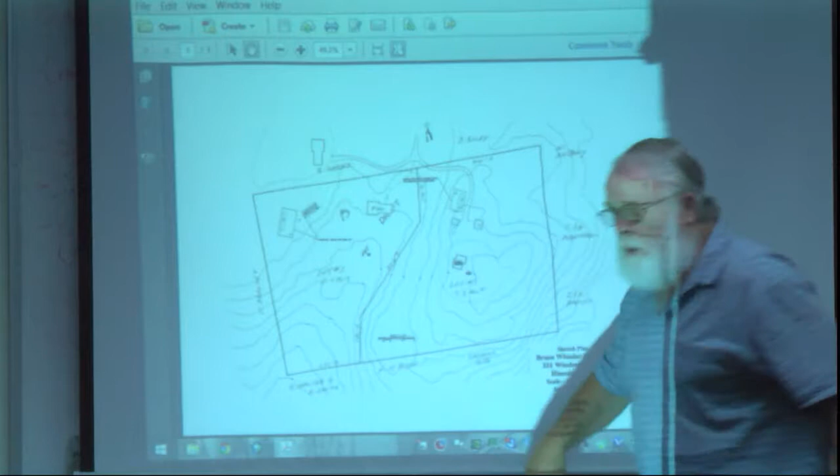So, where's that? I'll get up closer here. Just to the left of where the cursor is a little bit, right about in here in these contours. Yeah, and so that may end up having a 50-foot buffer around it, and the house is set so that that could be accomplished. And there's a right-of-way that comes in here.

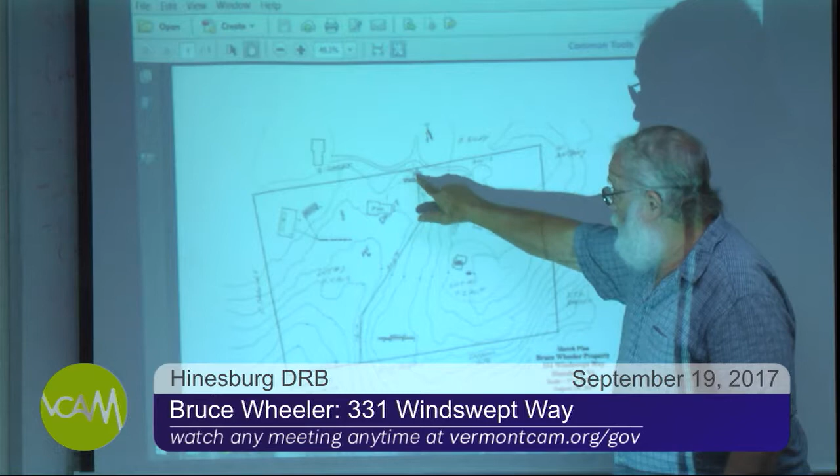The former subdivision north of this shows 50 feet coming right to the boundary here. This line will start, there's a pin on each side of the right-of-way, and this will be the easterly pin that makes the beginning of that line. So this 50 feet will come right to the boundary.

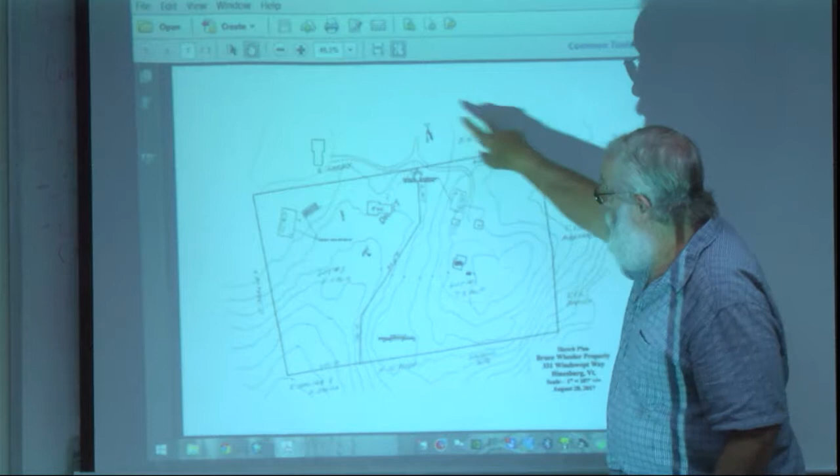So where does that way end right now, serving? The survey of this subdivision to the north shows the right-of-way coming right to the boundary. So are you going to keep the same driveway going off the existing house, or is that out of the right-of-way? That's a good question. I think it's just been there long enough to have it closed. Right, yeah.

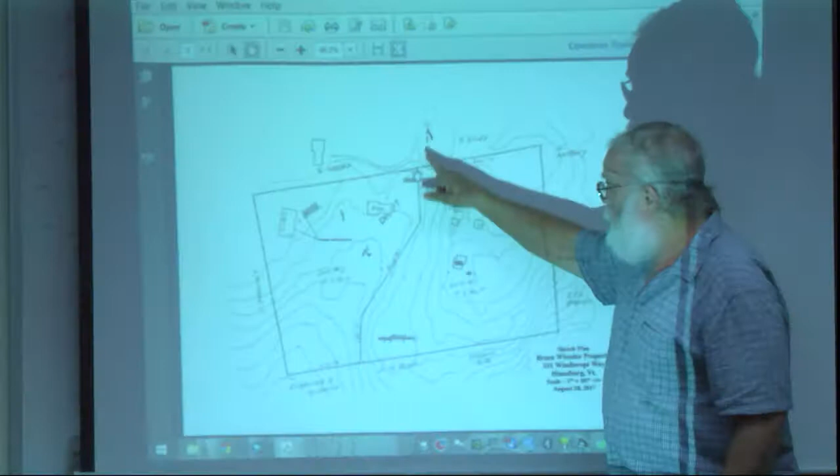So this new extension will be right through the right-of-way, opening onto the property. And the other will be reconciled with the neighbor. How many houses does Windswept Way serve?

How many houses does Windswept Way? Is it along? Didn't do a count. The total in the neighborhood, if you come up Obie Ridge Road and go straight, and Windswept Way, there's 19 houses altogether, I believe. It's probably 6 off Windswept Way.

Okay, well, using the location, you have Windswept Way here, and you have Obie Ridge, which comes, I think, there. And so you probably count them from here: 8, and Bruce is 9, and this would add 10, number 10.

And the condition of Windswept Way? What's the condition of Windswept Way? It's really excellent now. There's a lot of work done to it this summer. I see. I maintained it while I was there for years, and then the last couple of years it needed some repair, but it's had $10,000 or so put into it just recently.

You put up the one with the contours. Sure. This division, Bruce's house, existing house is here, and there's a fairly steep embankment going down to the west from the house, and the line will be in towards the bottom of those contours. I believe that was the Old Town Road way back. Oh, really?

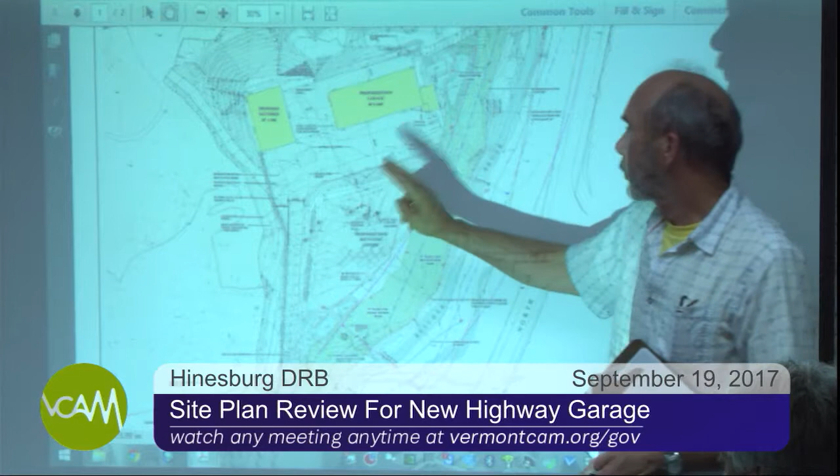Actually, there will be a time when CSWD has to move off-site because they've got to demolish this facility before they can build the new one here. And during that time, the access drive will be built and the rest of this will be paved in advance. So phase 3, 3A, let's call it, will be demolition, 3B will be construction, and then 4 will be the town coming back under separate contract and building the salt shed.

So how many years are we talking about for the phases? About a year and a half from now, if all goes well. All 3 phases? Yeah, all 4 phases. And how long will the drop-off center be out of commission? Well, I think Brian has to get back, but 2 to 4 months, maybe in that range.

It's about 2 weeks to demolish the existing facility, and then I think it's a little premature. He just saw the final version of this phasing plan, which has been evolving. There's a lot of entities here. There's the contractor, CSWD, the town self-performing some work, and then the town is hiring some work out by other contractors. So there's a lot of moving parts, trying to use what's already a small site to minimize the disruption.

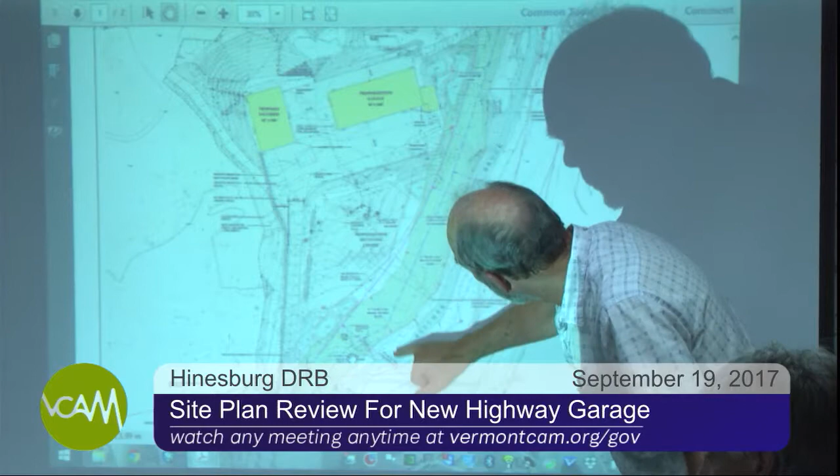Yeah, that's it. Maybe pull that up. Which one is that? I think that's what was up. I was pulling up this one? Yeah. It's there, it's just blurry. Oh, okay. Maybe zoom in into certain areas.

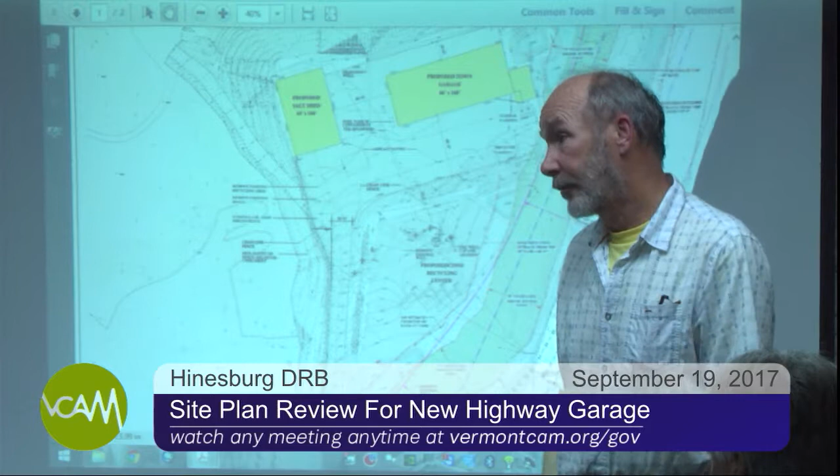I'd like to know what's there now, what's going away, what our roads are. We have an existing conditions plan, so maybe that's a place to start. Let's see. So this plan shows what's there now. Could you go bigger, Mitch? Yeah, I've been there, but that doesn't tell me anything. If we could blow that up.

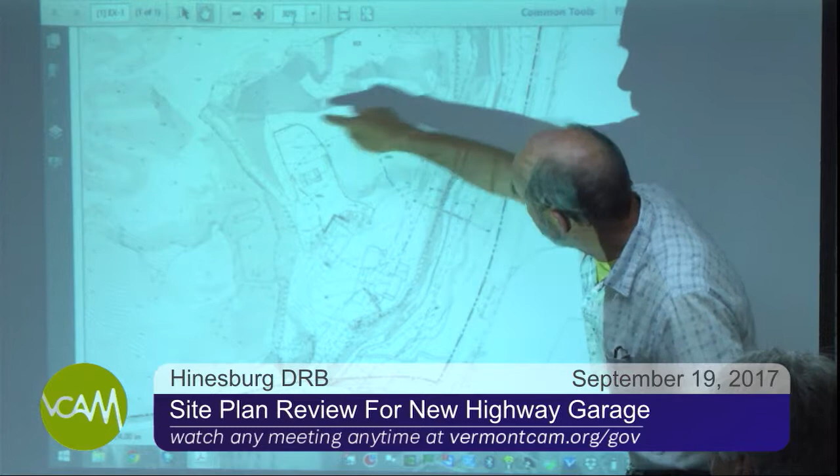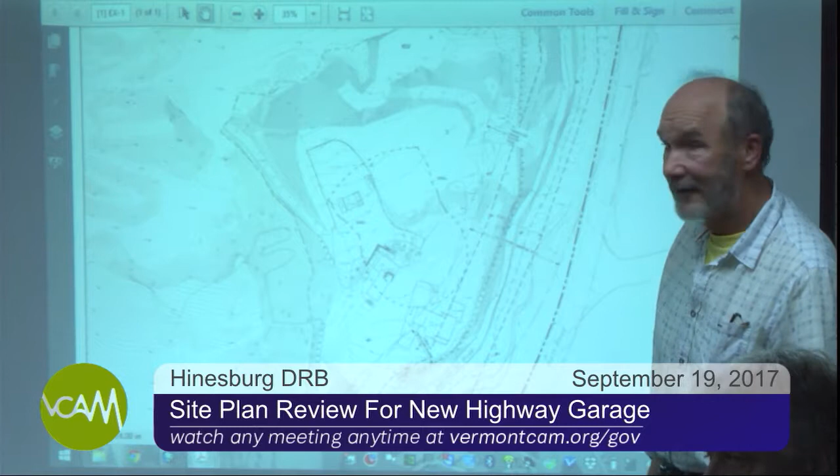Do you guys mind if we turn off the lights? Yeah, that'd be fine. If you don't mind the snoring. I'll poke you. The switch is over there. Got it. Thank you.

All right, so just to orient you, this is Beecher Hill Road. Existing driveway comes in here. The current town garage, the main building, is here. The brook is right here, so it's, I don't know, 30 feet from the brook. 12? 12 from the top of the bank, it's close. There's other structures and pavements around. There's a pole building over here which also belongs to the town garage.

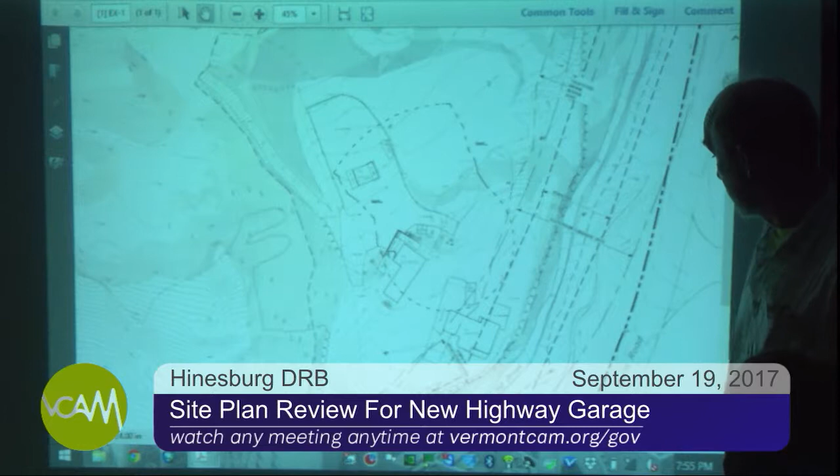Access to the recycling site is between these two buildings. The little entry booth is there, the little steep uphill is here, and then this is the current recycling drop-off center. They've got roll-off containers here for the metal and the trash, the original recycling shed, and some other trailers back here. This line here is a chain link fence. This is an open plateau right now, and that's where the new building's going.

There's an existing access road that Mike uses there, and another one over here to the upper part of the site for gravel. The open plateau is pretty much on the same grade as the parking lot. It used to be higher. If you haven't been there in 6 months, you'd think it was 6 to 8 feet higher, but Mike took a lot of that gravel out. Okay, that's why I'm confused, I didn't remember it being at the same level as the parking lot area.

So the idea is to build a structure there; the gravel slope behind would remain. These structures would be demolished, and any new construction would move out of the river bank area, 75 feet. Steve, would it be helpful if I showed the phasing plan? Sure, I think that might say a lot. Do you remember which drawing that is? I think it's L1.1.

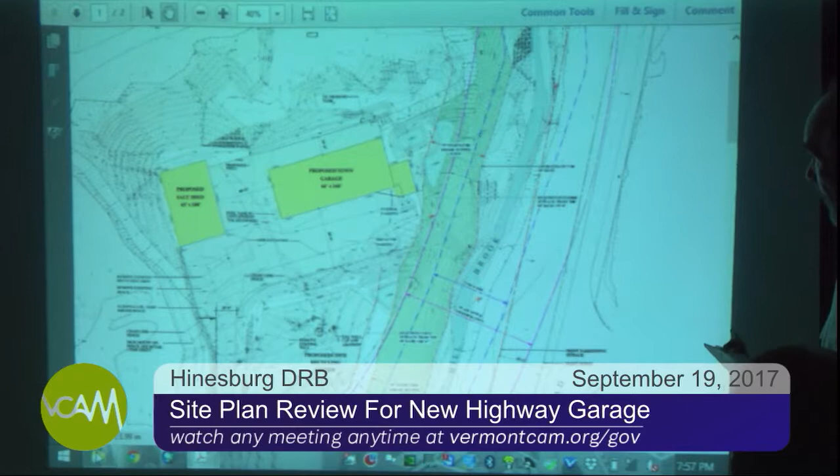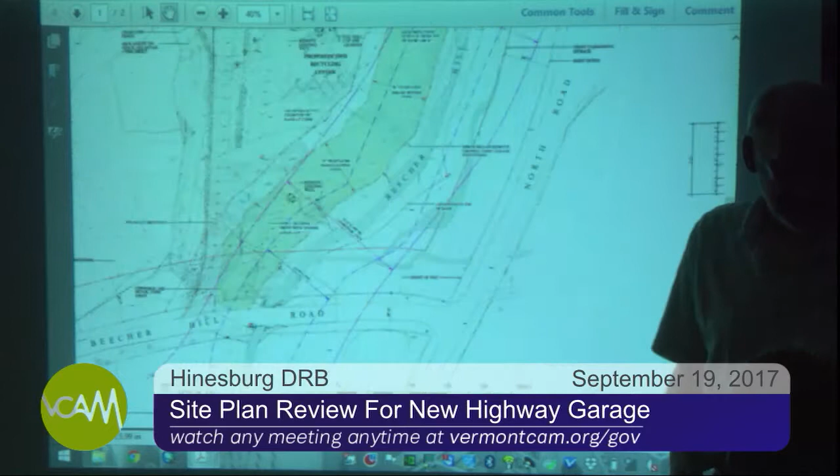No, so that's the overall site plan. Let's see. Maybe it's this one? No. L1.0 and 1.1, I think. Oh, wait, that's what it is. I forgot about that. This is in two sheets, so we just have to move down over here. Here we go.

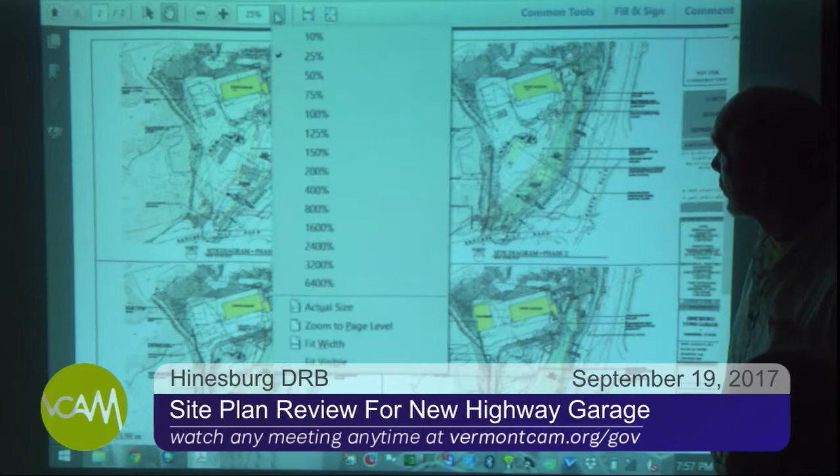I'll just show the overall, and then I'll zoom in on each of these phases. Let's start with phase 1. All right, so these are the 4 phases. So phase 1, recycling drop-off center stays the same. Booth is in place, really no changes other than the fence at the northeast corner moves in to allow a little more room here for access.

And Mike, you plan to use this for your salt? Winter sand. So construction access is shown by this arrow, up to this upper plateau, the town garage buildings stay, no work in the riverbank. And since this was done, we've added the new electric service as part of phase 1 too, but that's underground.

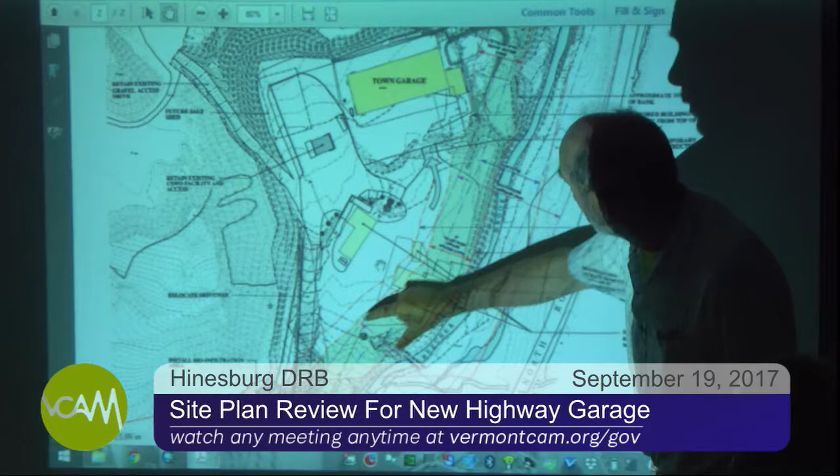So phase 2, these buildings are demolished, and much, not all, but much of the work restoring the stream bank, the river corridor is done. At the start of phase 2, the town moves into the new garage, which is substantially complete.

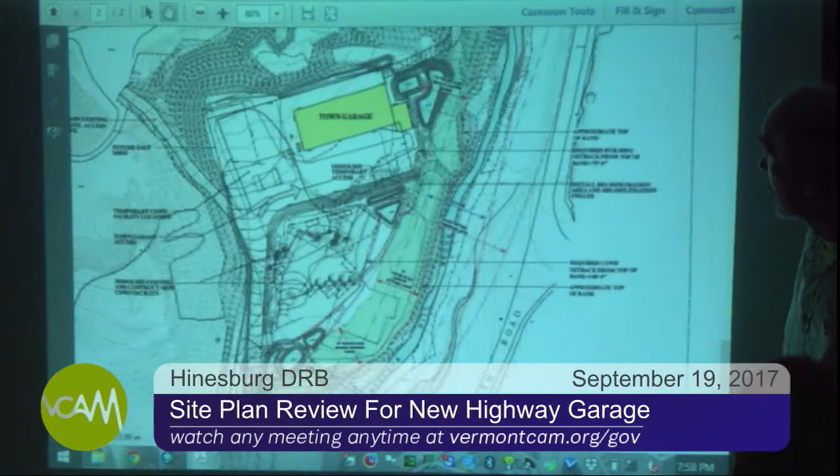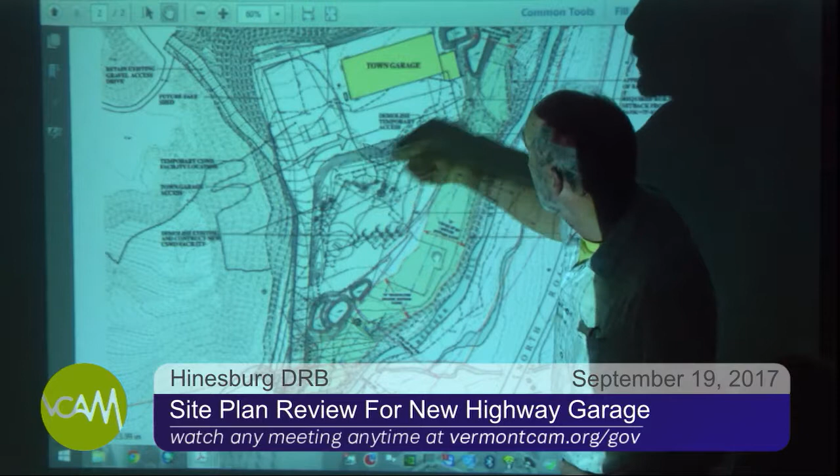In phase 3A, which we're calling it now, this facility is demolished and CSWD moves off-site while the new driveway is built. The old driveway comes in like this. The new driveway slides a little bit west out of the river corridor, not completely out, but as far as we can go without getting into this hill. And the rest of the site is paved, and the rest of the river corridor is restored. The fourth one is just construct the salt shed.

Is there equal paved surface in each plan? I don't remember there being a lot of paving currently. No, most of the town area is unpaved right now, it's gravel. So I think there's a net reduction in impermeable area. By an acre, right? 1.55 acres less impervious. So how do you accomplish that?

A lot of the area there is compacted gravel that they use for parking and driveways. Almost all of the area that's green on there is right now compacted gravel, which under the state stormwater rules is considered impervious surface. So because all of that is going from compacted impervious gravel to a pervious vegetated area, we're actually reducing the impervious surface by quite a bit.

There are no retention areas there right now. No, it's flat gravel, primarily, going directly into the stream. And there's proposed to be those ones to the south, the one in the middle and the one on the upper. Those are all basically retention areas. You want to explain how those work? Yeah, so what's really nice about this site is that it has gravel under it, so those stormwater basins are infiltration basins, which is kind of the best kind. It means that you're not just retaining the water for a little bit, you're actually infiltrating it. It's the best way to treat stormwater, and it's what the state looks for as their top tier treatment option.

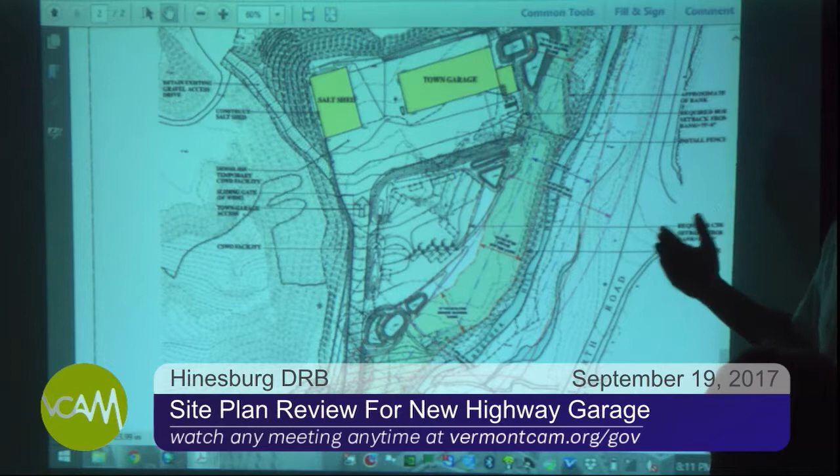In that area, say for example just above the staggered bins, there's a fairly substantial... is that an old grading plan? Yes, that's an old grading plan. The contours that run through there? You've seen the demolition below, all the different layers. Okay. So if you had a clearer drawing. That's relatively level. Right. It seems as if the apron for the town garage compresses this a little bit, and I presume that's a fairly substantial drop off that apron to the recycling facility? No, I think they're pretty level. They're within a foot of an elevation.

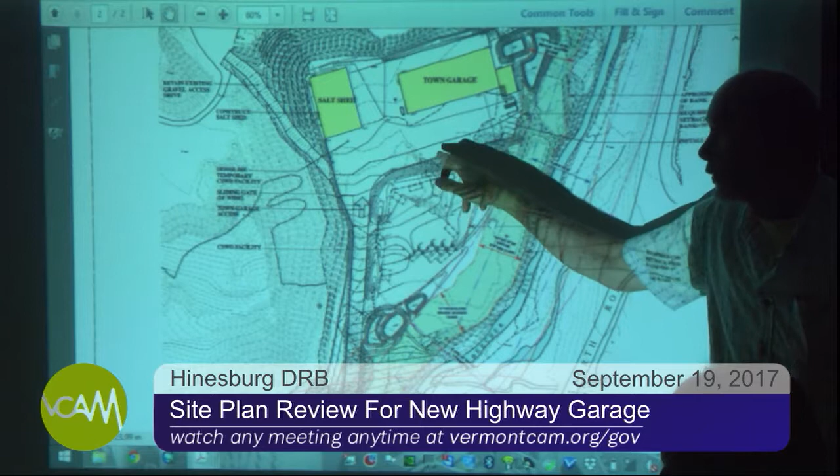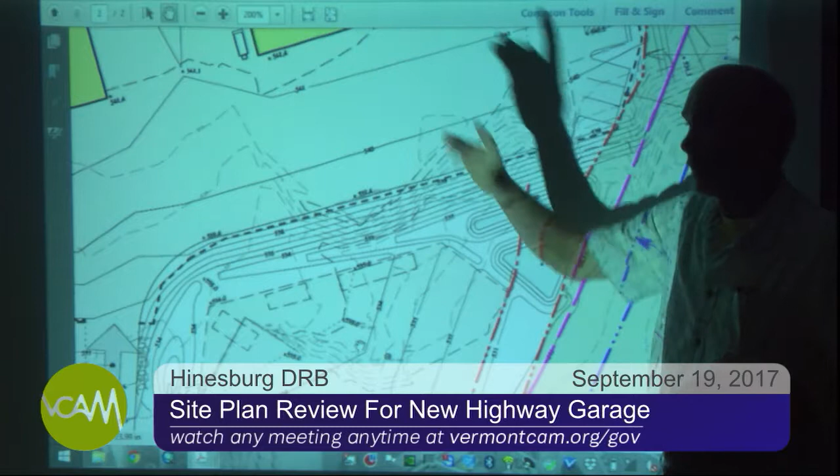So that again is old contours? No, these are new. There is a drop here. Yeah, that's what I'm asking. Is it 5, 6 feet? I think it varies from about 4 feet on the driveway side to about 6 feet on the opposite side. Let's zoom in on this. Yeah, I'm talking about that grade right there. Yes. It's about 6 feet at the maximum, I think. 6 feet grade differential. No, it's fine. The dimension of that apron from the building to the grade drop was set by the distance Mike needs to get the big trucks in and out of the garage bays. It's 80 feet. Okay.

So just looking at that, a potential way of enlarging the drop-off would be to put a vertical retaining wall there instead of a graded slope, and you'd get another 15, 20 feet. But it sounds like the truck requirement... Well, you can't change the apron, but you can take away the grade and make that a wall. It was a cost issue. But this way also gives us a vegetated swale. I think, Jessica, that was part of your stormwater calculations. Well, I've certainly been in recycling facilities. You're the one that knows, certainly better than we do.

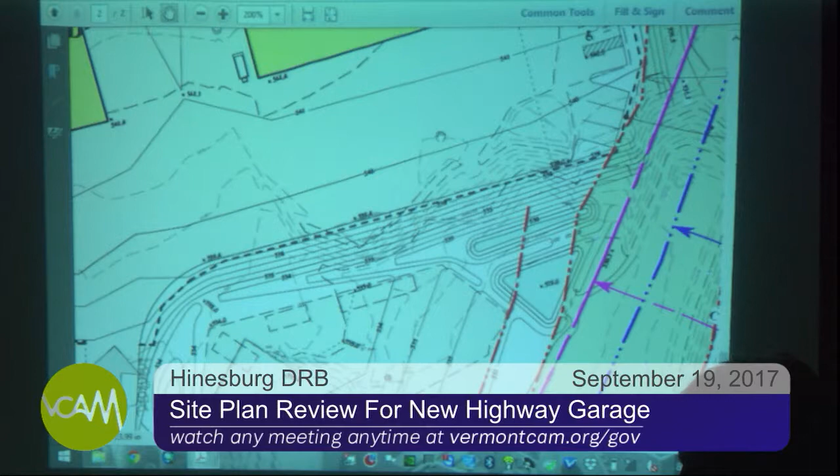This notion is a little like shopping in town where you park your car in one place, do a transaction there, then drive somewhere else and do another transaction. Seems like a terribly wasteful inclination. So my sense is, you know, I go to the facility and do some of that naughty stuff.

So you move your car? I try not to, but I confess that on occasion I might.

But I would think if you could resolve the internal solution on your particular site and work that a little more efficiently, it really is just one stop, you're not hopping out of your car. It seems ridiculous to me to be doing that. That's the way it's designed and shown right now, as one stop.

But the problem is that our customers all want the one or two spots right by the compactors. That's literally the truth. Unfortunately, they will pay at the booth, pull forward, then slow down and wait to see if someone's going to move or leave, rather than just take an open spot. It's pretty remarkable that way.

Well, the area seems sufficient. It's not a whole lot different in terms of overall square footage or acreage than what you've got right now, so it seems like a workable situation.

When you move the access on Beecher Hill, a little further down Beecher Hill, that's kind of in the area where you currently have the residential sand piles. Those are still going to be available to residents? There's still an area there for that. It doesn't really get into that too much, but there'll still be the potential for doing that.

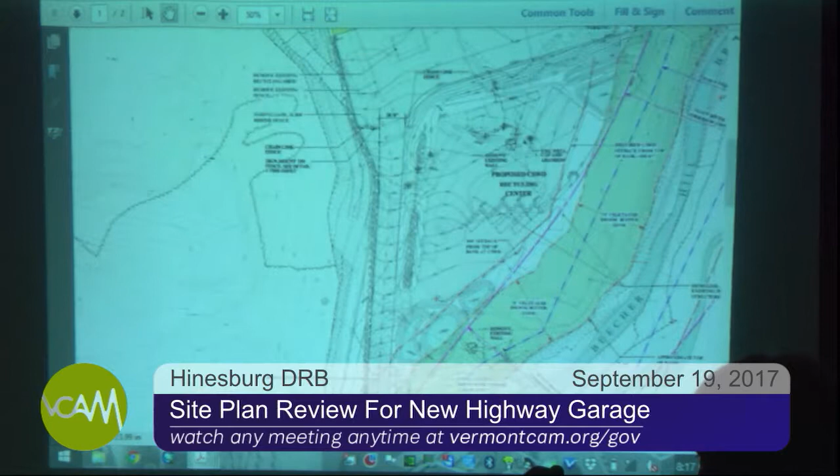I don't plan on doing more work. No change in use. And the way the building will be facing south now, any sound coming out of the building will go away from that. Maybe neighbors would like to hear something more specific if you can.

Mike, if I can, aren't you going to be moving the trucks quite a bit less at the new facility? Yeah, because we're not going to be working our sand pile once we have the salt shed, because currently it takes 20 minutes to load a truck when it's frozen and snow covered. Once it's inside the shed, hopefully it's not going to freeze as hard, and we'll be loading inside that shed. So during the winter, we're going to be moving around a lot less.

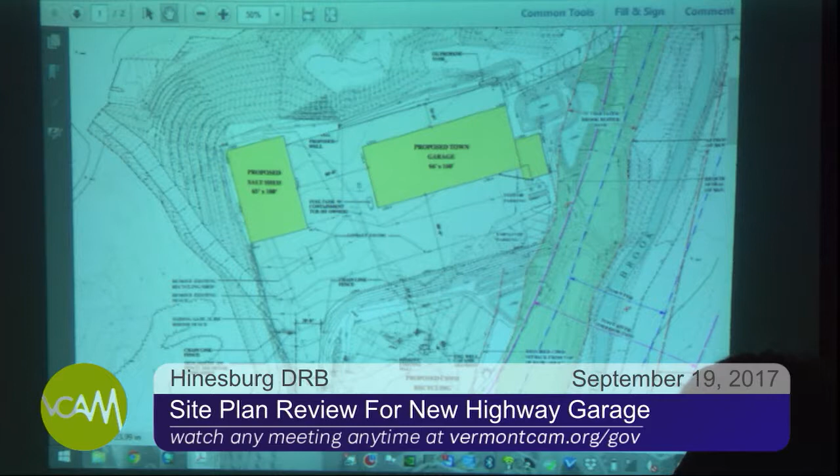So can we get testimony that would allow us to make findings that indeed noise impacts might be lessened by this configuration?

With specificity towards this particular neighbor, can you tell us where the road is in relation? Right across the street, I think, North Road. Oh, and it's not right across the street, it's up here, it's up the road quite a ways.

Okay, all right. Is that entrance that we're seeing Lincoln Hill? A little below that's Lincoln Hill, just at the bottom of the drawing. Yeah, Lincoln Hill's entry would be up, like another inch or so above where the cursor is here.

But Dennis, should I read the letter at this time, or was I gonna wait till public comment?

For those of you who are interested, Mike printed out the map, so here are the garage operations. I'll pass it down. I think most of us back here can't see anything. Yeah, that's why I'll pass it down. The house that they're talking about is back here, and it's 1,000 feet from the operation. But it is a concern, and we care. Across the road is a relative term, I guess.

The letter is from Jane Racer and David Cloutier, I hope I pronounced that. Cloutier? Cloutier. Okay. We live across from the existing town garage and transfer station on the east side of North Road.

Our property is situated on a hillside, and the sound carries from the existing gravel pit and gravel site. My main concern is an even higher amount of noise level during the construction period and after, with more truck traffic, machinery, etc. Sound has been an issue in the past. The police would use the pit for gun practice without warning neighbors, and it sounded as though they were right in my yard. I called and complained several times, questioning using a rural residential site for that purpose.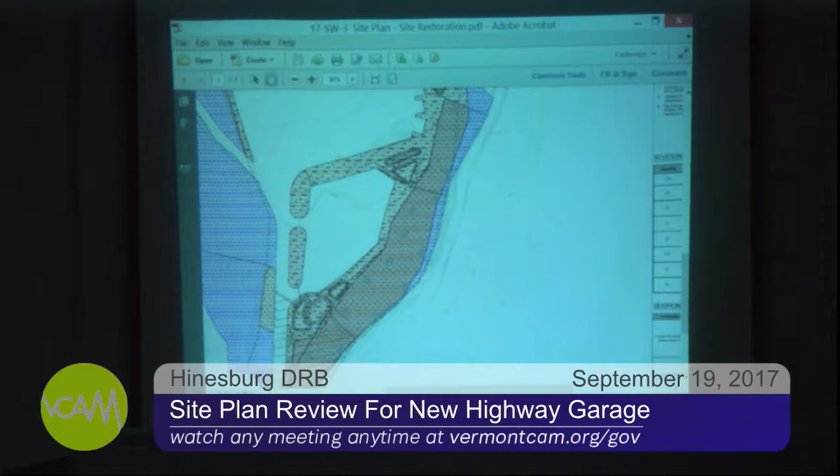I should also say, on the plan there's some big trees too. We didn't want to wait for the little trees to get big, so we're doing a mix of little trees and big trees. Oh, you can see these, actually these, see, so those ones there are actual big trees - 4 to 5 foot tall, or 2 to 2.5 inch caliper, ball and burlap trees, a mix of both sugar maples and red oaks. They're the ones that have the big symbol.

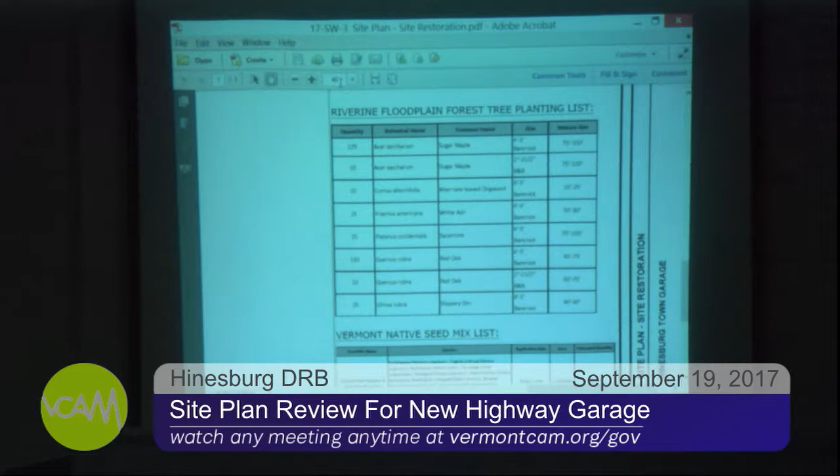And then in the area where it has the hatching is a mix of all the other species, which is sugar maple, dogwood, white ash, sycamore, red oak, and slippery elm. Those were all based on the specific tree species you'd find naturally in a riverine floodplain, such as even just across the river where there is a natural floodplain on the other side of Beecher Hill Brook.

So do I understand that your proposal is mostly to put landscaping in the buffer area? Yes. On the theory that that would be the most effective screening from the road? From the road, from the river, and from any residents on the lower edge of the site.

If you look at the grading, the other edges of the site, the northern edge and the western edge of the site are really high. So you have a steep bank around those sides of the site already, and there isn't really any disturbance happening over there.

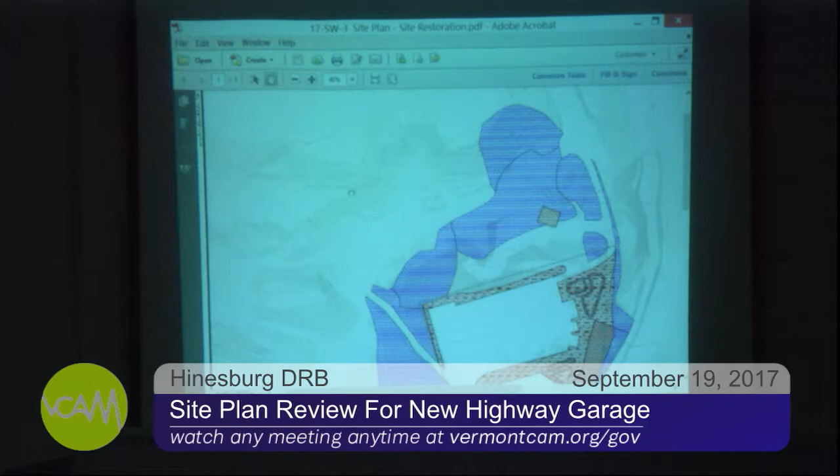So we're focusing the landscaping in the area where right now it's compacted gravel and buildings, an area where we really want to restore, the river corridor. It's not decorative landscaping. The landscaping is to naturalize the river corridor and to provide treatment in the stormwater swales and treatment areas.

Is the elevation of the new building plus or minus 6 feet above the existing building? Yes, but by building, you mean the 2 garages, right? Right, that's about right. It's gonna be a little higher up, 6 to 8 feet higher maybe.

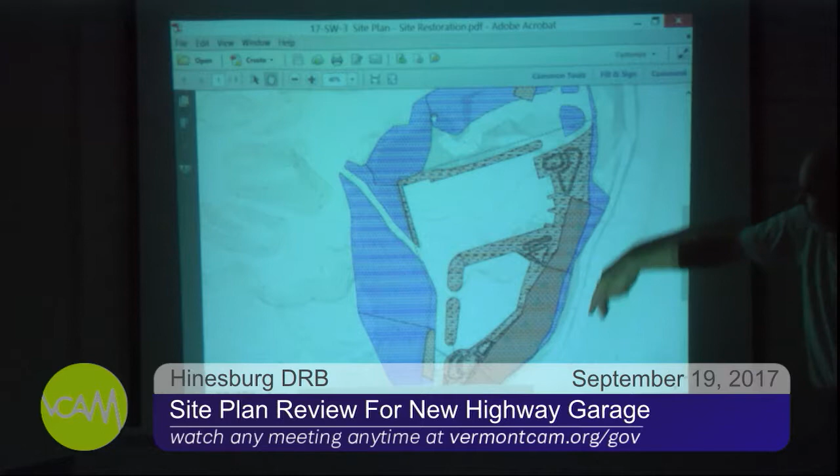May or may not affect sound traveling from it. Could be - I think maybe what she's hearing is sometimes Mike has to get up on the hill behind to collect or work with gravel, and that sound would be more likely to travel, and that'll continue as it has. I think the operations here are to a large degree protected by the hills to the north and west. It rises up pretty sharply this way, and it's open to sound traveling east - not open because trees line both sides of the brook, but open to sound.

That's more likely, southeast. So from looking at the elevations, I assumed, since I didn't check the dimensions of the old building, that it looked taller than the current buildings. It is taller - the building size lets you lift the dump truck bed to work on it inside. So we're talking another 10 or 12 feet tall.

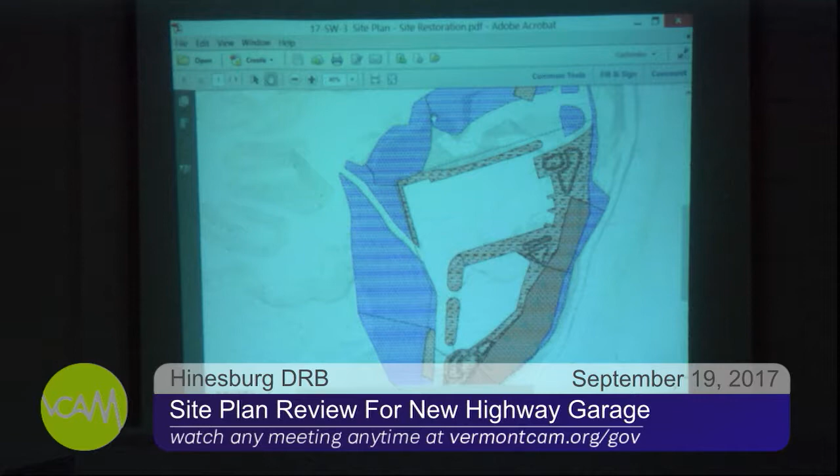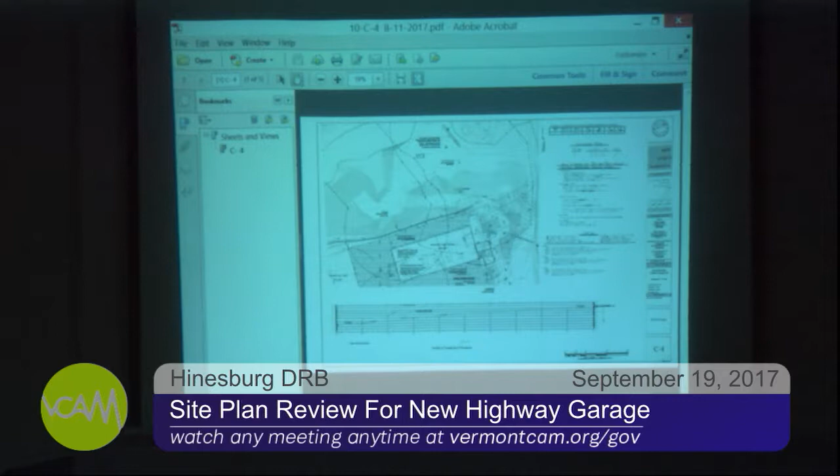And it's on top of a 6 to 8 foot elevation, so it's more than 8 feet taller than the old buildings. Well, if you're talking roof heights, yeah - roof peak, top elevation. Well, it's not a peak, right? It's a flat roof.

So I had 3 questions. As far as the wetland mixes, given how well this site drains, will wetland plants even survive? No, wetland was a poor way to describe this - the wet meadow and detention basin mix is not truly a wetland species. I worked with a plant biologist on these specific species, and they really are for stormwater treatment areas.

We went over the soils on the site, and these work really well for inundation for small periods of time after storms, and are completely fine for when the site dries out between storms. So as far as the stormwater basins and the storm year - I asked earlier and you said it would overtop at 100. What year storm would it not overtop the basins, the ponds?

Somewhere in between 1 and 10. Which means tomorrow. Isn't 10 year the state minimum for stormwater? It is, but not for detention - you're not required to hold the entire 10-year storm before it overflows.

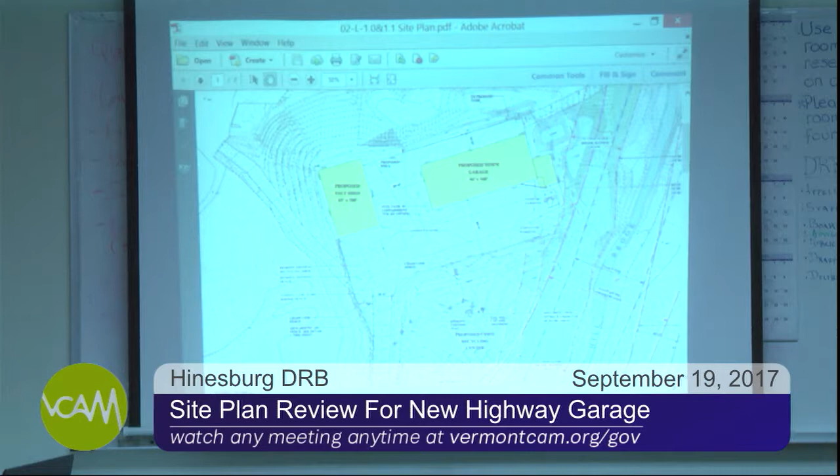Well, I'll open it up to the public. I don't think anybody's here for, you did have one question about the parking though, switching to handicap. Oh, yeah, we made that change and we've added some additional, so now you have a total of 9 parking spots for 4 or 5 employees. Okay. Just for the record, the spots that were shown on the plan, you have 1, 2, you have these 2 that are here, and you have 3 over here. On some of the other plans, I know this was just a little error, but these over here were shown as handicap.

But even assuming 1 handicap and 4 employees, if a member of the public came here and wasn't handicapped, they really technically didn't have a space. So, per our conversations, they've added some parking spaces over here. And Mike, I guess it would generally be your employees that would be parking here, so they can move so the trucks can come out. And then you have some parking here potentially for the public. But as I understand, there's very little public that actually comes.

And do we want to go over the sign real quick? It's an interesting question with the sign, and I put that in there because if this is completely not visible from the public right-of-way, it's not technically a sign. Are you talking about the CSWD sign or which sign? The CSWD sign is existing, we're talking about the town garage sign. Mike, is it gonna ever be visible? If it is visible, it's an easy little, not a big deal.

And I think it might be worth it just to have the DRB say it's not a big deal, it's a legitimate sign. If it's visible, it meets the standard. But you could stand down on Beecher Hill Road and see the sign from the road. It would be a vantage point where you could see it. Well, then that makes it a sign.

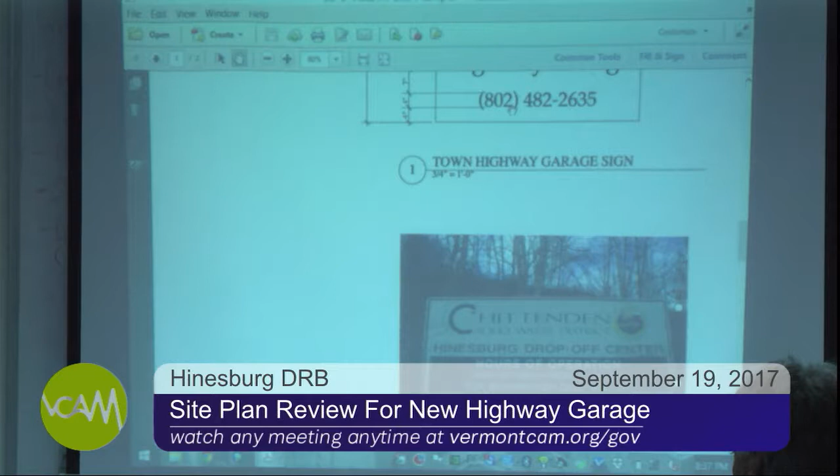The Chittenden drop-off center, that's more of an advertisement. So that one might have to be a little more strict about meeting the rules, I would think. Right, but that's an existing sign that is gonna continue in its approximate spot. That's what I understand. Okay. And it did get an approval way back, I think in 93 or 94. It was in the report.

So exterior lighting, is it all on the building? Is that what I'm gathering? Yeah, so the story there, it's all on the garage. Yep. None for the salt shed, none for CSWD. Okay. And I believe there are 6 wall-mounted fixtures. They're all sharp cutoff LED, and then 2 under the canopy at the entrance, controlled by switch, but also with a motion detector. 3, 4, 5, 6, and 2 under here. Yep, okay. Yeah, I don't know if you need to see it this way.

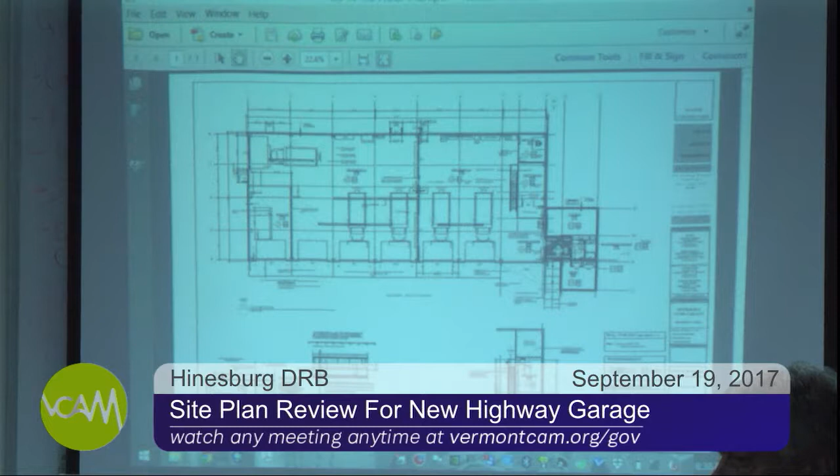You don't use the salt shed at night? Excuse me? You don't use the salt shed at night? Yeah, just to load a truck, as needed. We're not working in there, so. Right, so it doesn't need lighting.

Take that up in deliberative session or something, or what do you want to do? I guess I'd rather take it up in deliberative session. Yeah, me too. Just give us a chance to talk about it instead of taking up time here. You making a motion? I guess we don't have any public input, so yeah, I'd make a motion we close the public input and take it to deliberative session after the meeting. Second. All those in favor? Aye. Aye.

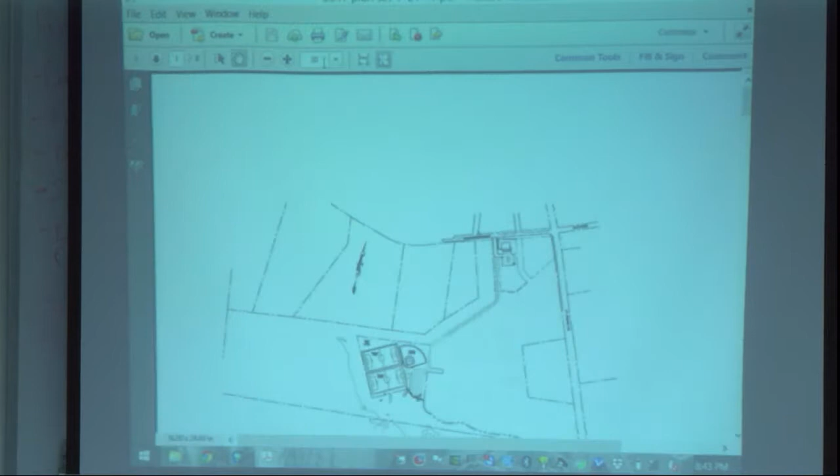Okay. Would it make sense to escrow landscaping funds so that when Haystack gets built out, you can then screen it later, or is that something, I don't know. We have funds available now. No, I know, but your point is that there's nothing to screen now, so it doesn't make sense to try to put it in when you don't know what it's gonna look like and what is gonna need to be screened, which I can appreciate. I just didn't know if it made sense to hold back some funds so that if and when it's developed, appropriate screening can be placed. Or if you even do that.

In my opinion, the plantings that are yet to come on the east side will be adequate. It's gonna look very nice. If you've been down there to see the plantings that have already been done between the parking lot and the field, and you mimic that all the way around, I think it's gonna be very visually pleasing, as opposed to the solid cedar shrub hedge that was in the original plan. I think it's a decrease in the number, but it's an increase in the effect.

What's the lot underlay there? What is what? I didn't hear you. What's the lot underlay there? Oh, that's Haystack Crossing. So the road will move. The plan is that road will come in through the normal development if the development's ever finished. Got it. So that road goes away. That road goes away. Yeah, it's not cutting through the homes. Do we have a pointer so you can just show on the map how the landscaping changed? Because we don't have a revised landscaping plan, do we?

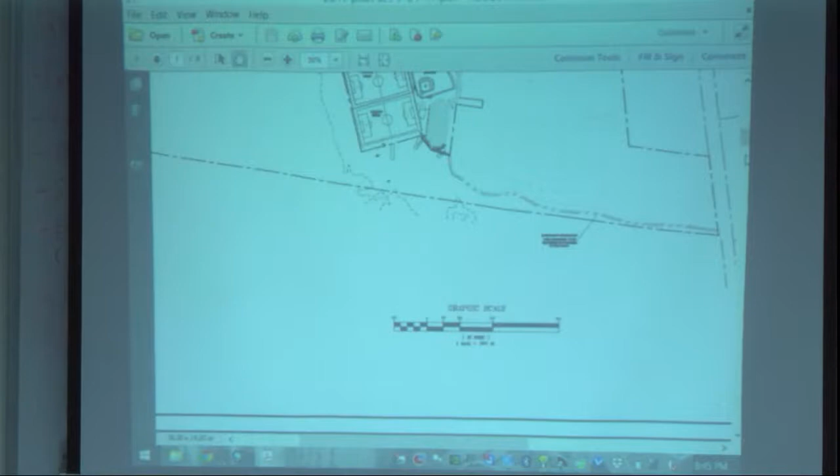Yeah, I don't have any idea what's actually there, and I don't know what's changing at this point. Well, this is the landscaping plan that's here, and what was there before was a group of trees in this particular area. There's about 30 cedar trees, I think, along there, mixed in with a couple of hardwoods. And so you gave us a narrative, but can you be more descriptive about how it's gonna change?

The basic idea, as I understand it, is the cedar hedge is the part that's been taken out. There are several trees planted between the parking lot and the playing field. I think we planted 4 or 5 along there. Two of the islands have been finished. We haven't planted anything on the northern edge of the parking lot yet because there's still plenty of construction to do.

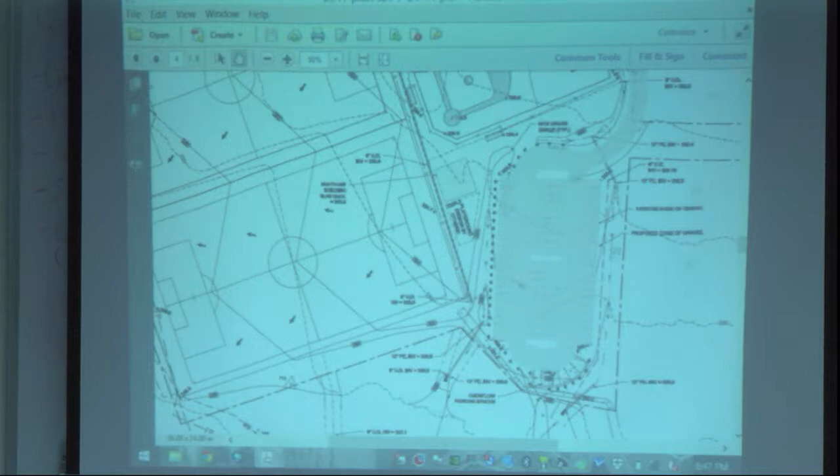And there's boulders on the site now which need to be placed around the edge of the parking lot. And there was something, I don't know where I read it, about the baseball field having to be moved and the playground having to be decreased for some reason. The playground was originally in this area, and I think the new road impacted it, so it's been moved from over here to over here.

I tried to look to see, it was in the narrative that basically explained that the ball field moved. It's really hard to see exactly where, I'm not exactly even sure. So where was the original road? I mean, I can't imagine we would have approved a plan that had the road over top of the baseball field or running through a playground, so.

I believe the original road actually mimicked this proposed Haystack Crossing Development Road, and it would come back into here, as I remember. And Tom, I'll let you talk about, I guess it was built, instead of being like this, the road was moved here, like that. Right.

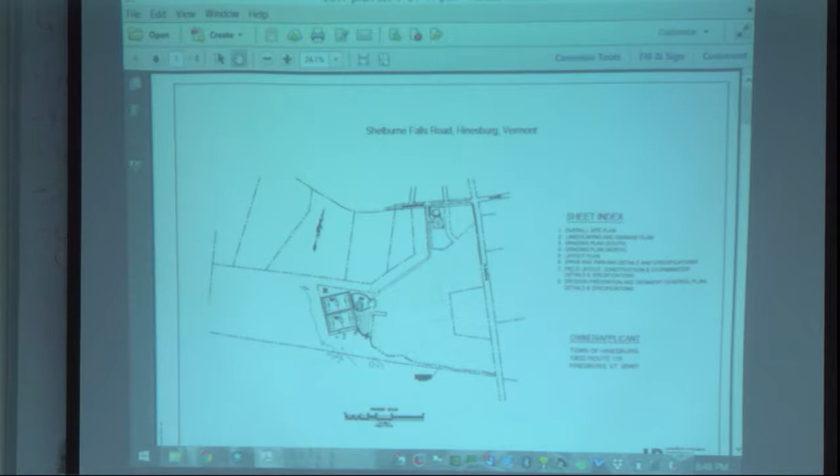Well, there was a site plan that was approved where the road was supposed to go. So I don't understand why it was not built to the plan, or it didn't come back to the board to say, hey, there's a problem here. We'd like to redirect the road.

I mean, the town of all people should know that when there's a site plan, it's expected that you're going to follow it or you're going to request a change to it, as opposed to other applicants that we've had that have made changes without requesting. So I'm just a little surprised that it wasn't built to plan, or we weren't asked about it before it was built. Well, there's a couple things.

Like I said, our rec field proposal was kind of working hand in hand with Haystack, which at some point along the line, Haystack is kind of off in the ether right now. When that happened, the agricultural field, which was being hayed and still could be hayed, at the request of Joe Bissonette, the owner of the property, wanted to keep as much of that agricultural field available for his haying as he could. And he felt that the road in that position would be much more valuable to him as the landowner and farmer.

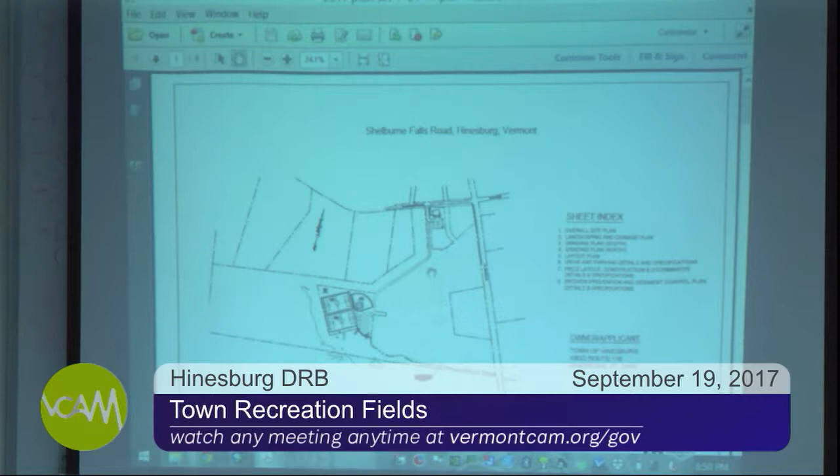That's a very good question, Mitch. And our assumption is that it's going to be moved, which is another reason why we feel that the 20-foot width is appropriate to serve the rec fields, and it would allow us to not spend money on something that's just going to be torn out in the future. I thought I remember approving a temporary road.

Can you pull out the original site plan? I thought for sure we did. That's my memory, that it was always intended to be temporary and that it would be taken out when the actual roads for the development got put in. Yeah, so we did approve that road. Do we approve the modified location? Actually, I didn't bring that. See, this all sounds very familiar, like it's gone. I thought for sure we did. We should have that available.

Well, I thought you did. Before construction began. I thought we did. I didn't actually include that in this packet. I can look it up. We knew it would be temporary because we weren't sure what was gonna happen. I could take 5 minutes and you can continue. Yeah, sure.

Well, we can go on to, so there was the culvert question or something? That's a culvert that's like out on Shelburne Road? Well, Lamoureux and Dickinson says, although the road is now at a different location than currently approved, we have been told by Tom Ayer there's a constructed 20-foot wide box cut. So it is not in the location that was approved. Is that at Shelburne Falls Road or out where that swale is? The culvert in the plan is out where the swale is.

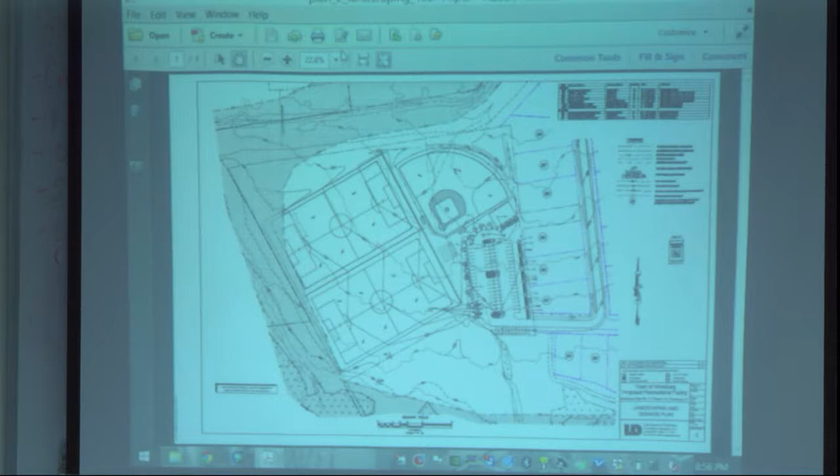Let's see, here is the original landscaping plan. So it looks like there's still an access off the parking lot for emergency vehicles to squeak around the end. Yeah, that's what they were gonna use that spot where the playground went. I think they were thinking that was how ambulances would get to the fields if they needed to. Oh, it's all coming back to me. Do you remember that? They were gonna leave a gate open and they could drive there. Let's try site plan.

Yeah, it looks like in the current plan where the walking path comes down past the parking lot, it's built up. It looks like there's a little connection to the parking lot where an emergency vehicle could get to the soccer field. I assume right there. Right, this was the original site plan. And you can see how the road kind of mimicked where the potential road on the Haystack development was going to be. And where the new one curves in a little bit more over here and comes around like this. And then evens out to come like this and then into here.

That's the difference. And Mitch, in the original approval, was there any provision for dealing with water runoff? Looking at the plans, the original plan had a wider section that included shoulders, as well as swales that were to bring the water faster to perhaps these areas out over here.

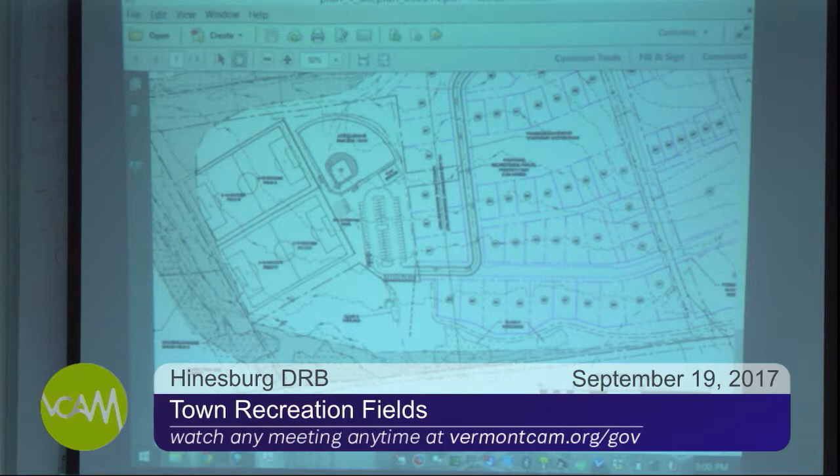Exactly, so that was kind of the oddity as you look at it, let's just use half a road, you're talking about 10 foot wide of gravel and then a more pitched 3-foot shoulder. If somebody's got a swale there, that's somewhere somebody's not going to want to be, versus somebody pulling off onto a grassed area.

But then again, there are 80 parking spaces, and that should be sufficient. I was talking to Jen, and I don't know, Jen, if you want to talk about that a bit as far as the use. The other thing is, it's apples and oranges.

If you do a soccer jamboree, that's going to be in the fall. You're not going to have baseball going likely in the fall unless it was a fall ball thing. And then in the spring, if it was a lacrosse jamboree as opposed to, you could do lacrosse and baseball. So in a perfect world, sure, it'd be great to have 140 parking spots, but would that be necessary? No. The number of times that you would need all this parking is small.

So I did feel fairly confident with the 80 spots for the lot. Maybe some overflow here and there, maybe we have a volunteer or two directing some traffic, moving some flow. It's usually what happens at jamborees anyway.

The Charlotte soccer jamboree was last Saturday at Charlotte Central School. I talked to the coordinator today. They had 2 Recreation Commission members that directed parking and people were carpooling, so I still feel okay with the number of spots.

And in Charlotte, there's like nowhere else to park. Here you could park up the road, you can park in town, there's definitely more of a venue to park somewhere, trek in, carpool, walk, that sort of thing. You're absolutely right. The Charlotte Central School, it's kind of a destination, and there isn't a lot of area because it's public, it's private homes adjacent to the school. So we're in a different scenario.